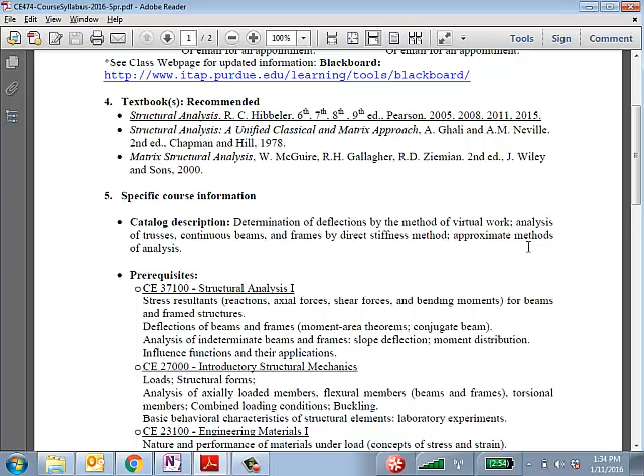Specific goals for the course are on the next page. Essentially this revolves around the key topics in this course. In the previous course, say 371 or Structural Analysis 1, you might have learned basic techniques of structural analysis, mostly for determinate structures. Did you guys see indeterminate structures back in 371?

Some indeterminate structures. So here, what we're going to learn is a slightly different way to approach analysis problems. These are based on energy methods, which is the first topic - principle of virtual work - to analyze different types of structures. We get into a method called the force and flexibility method, which you've probably seen in a simpler form for determinate and indeterminate structures. And then the main focus of this course is going to be on topic 3, the displacement or stiffness method.

In this displacement and stiffness method, we will make pretty heavy use of a computer program, essentially MATLAB, where you won't have to program, but I'll give you sample MATLAB codes to be able to do simple structural analysis, for which you do need some basic knowledge of MATLAB. And I know that some of you may not be very comfortable with that, which is perfectly fine.

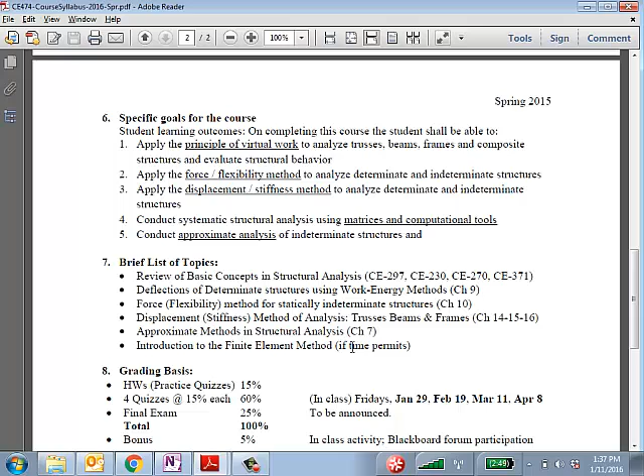We'll work through that, and I'll do a few sessions on basics of MATLAB as well, for you to get some experience with how to run those codes and how to analyze the structures. And finally, we have approximate analysis methods. This is sort of the brief list of topics. I've listed one last topic on an introduction to finite element methods. This is a method that is applicable to not just structural frames and those types of structures, but in general, any structure that can be used. So let's see if we get time to get there.

Any questions so far on any of the topics or things, or contact hours or anything?

Okay, so let me get into the grading basis then. There's going to be a few homeworks, pretty much one every week, but I'm going to do homeworks a little differently than what you might be used to. It works pretty fine, I'll talk about that in a bit. There will be 4 quizzes over the duration of the semester, and initially I was planning to hold those quizzes right here in class on Friday, but looking like it looks like we're going to be a really tight fit in this room, so we might have to move it to an afternoon or evening exam type of quiz.

So I'll figure that out and let you know. But the dates would be these. These are Fridays of every 3rd week into the semester. So please do make a note of that. If there's any conflicts, let me know as soon as possible. There's a final exam, 25%. That brings us the total to 100.

And there's going to be in-class small activities from time to time, which is basically just to make sure that you are participating and following what is being covered. So that's a bonus over and above the 100%. So that's sort of the grading basis. Like I said, I'll come back to the homeworks.

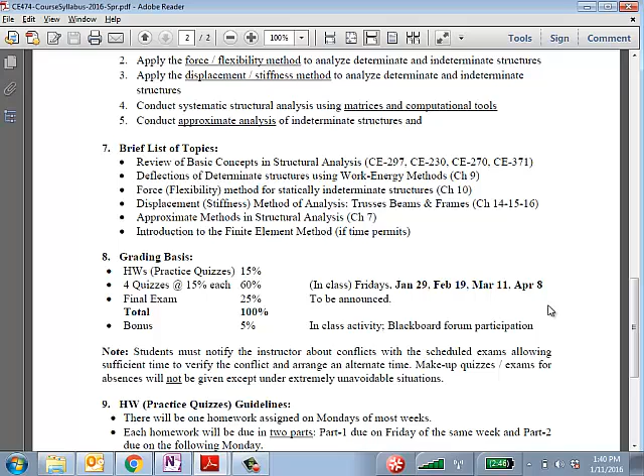All right, so let me talk a little bit about the homeworks. As you can see, it says there's two parts to it. Essentially, it's the same homework, just you need to submit it in two parts. In part one, you make your best effort independently without any external help, and it doesn't matter if you get the problems right or wrong. Okay, just make your honest, independent effort.

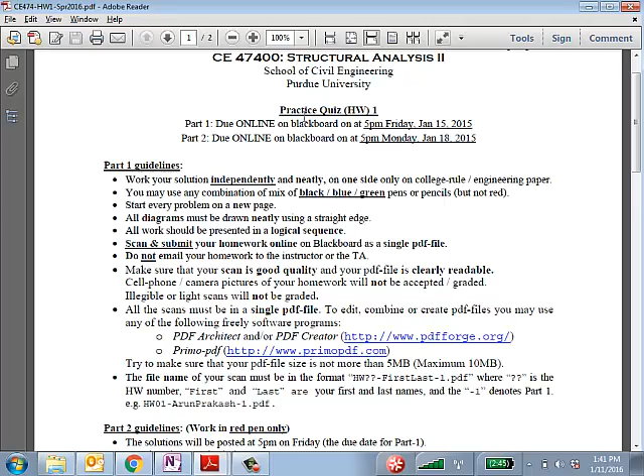Then scan and submit your homework to the Blackboard website. I've given some directions here on how to create a PDF file if you haven't done that before. And then this part one would be due on Friday. And on Friday itself, we'll post the solutions to this homework. Even though I'm calling it a homework, I sort of refer to this as a practice quiz. It's practice for the quiz that comes every third week in the course, and actually practice for everything following that as well.

So part two is basically where you take your solution from part one and, looking at the posted solutions, compare your solution to the posted solution. As long as you correct any errors that you might have made in your own solution, and I added a few more points here, like list the most important concept for each problem that you think you learned from doing this problem, and briefly comment about how you would cross-check your own solution or the posted solution. So part two is basically making sure that you go back and look at your own solution from part one.

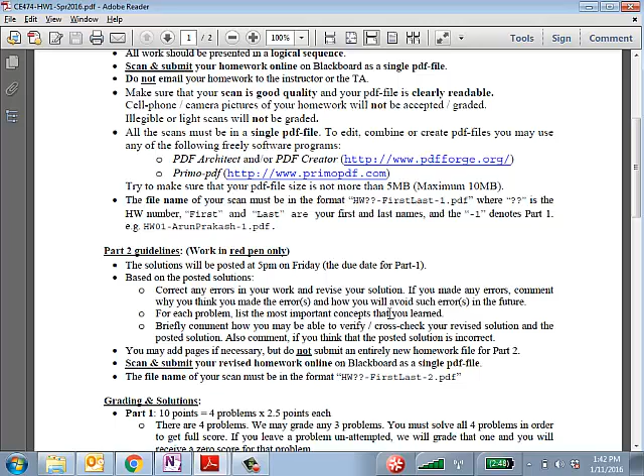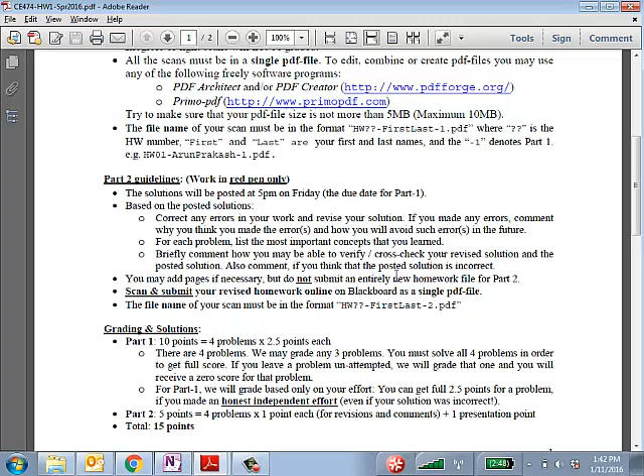And then you need to just upload the revised PDF back to the Blackboard web page. And the way that we are going to grade this is part one is 10 points, where again, as I said, do it independently, doesn't matter if you get the problem wrong. If you made an honest effort, you're going to get full points for that. Part two is 5 points, where we look at your revised solution, if you made any errors, correct them, comment on what we learned, and all that stuff. And then 1 point for presentation, for a total of 15 points for each homework.

So there will be 10 weeks, 10 homeworks through the semester, 15 points each. That's 15% of the grading basis. Make sense? Okay. Any questions on this? No? All right.

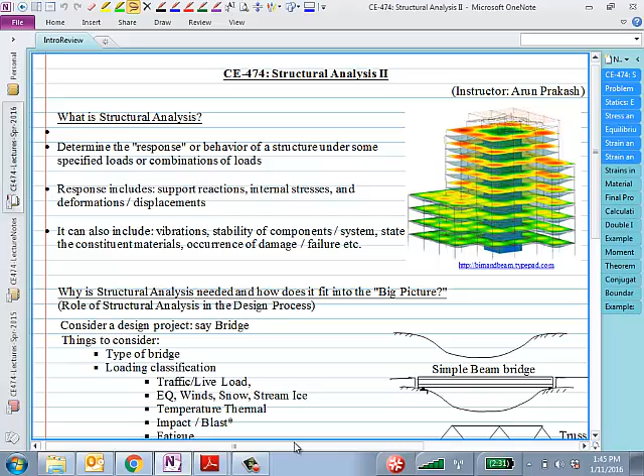All right, so today we'll keep it fairly simple and straightforward—basic introduction type material. As you all know, structural analysis is basically trying to determine how a given structure responds to loads and any type of stimulus to the structure itself. The response—what do we mean by response?

Basically, we need to find the external reactions given loadings, boundary conditions, the structure, and supports. We want to find what the external reactions are, and what all the internal forces are—in terms of shear force, bending moments at different points in the structure, what the stresses and strains are at different points. That's essentially what structural analysis is. We try to analyze a structure for given loads and boundary conditions and so on.

I would also point out that structural analysis, in a more general sense, also involves dynamics. What you all have studied until now are mostly static conditions—like given a structure, given load, how much is the deflection, or what is the shear force or bending moment at a certain point, at a specific instant of time,

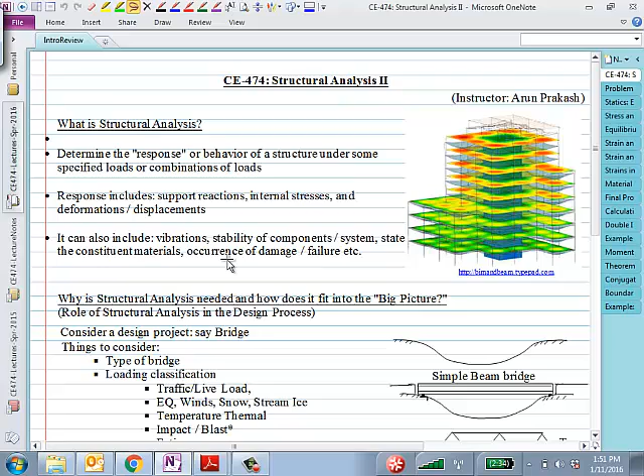Essentially what's happening is that up until a certain amount of load, the structure was stable. But as soon as we reached what is called the Euler buckling load, the column buckles and it becomes unstable. This is an advanced concept, but these are things you will learn as you go on to practice, and also as you go on to graduate school.

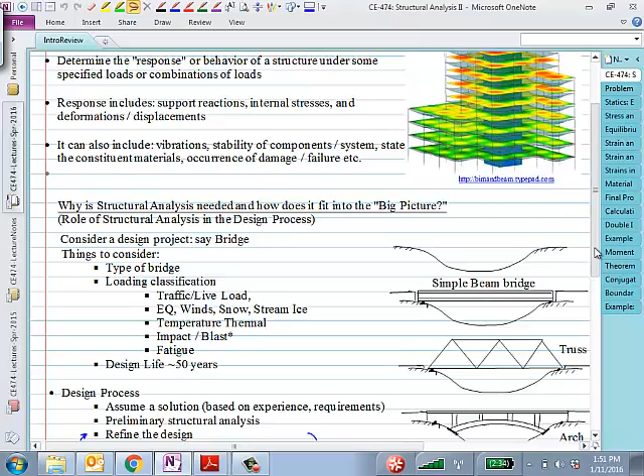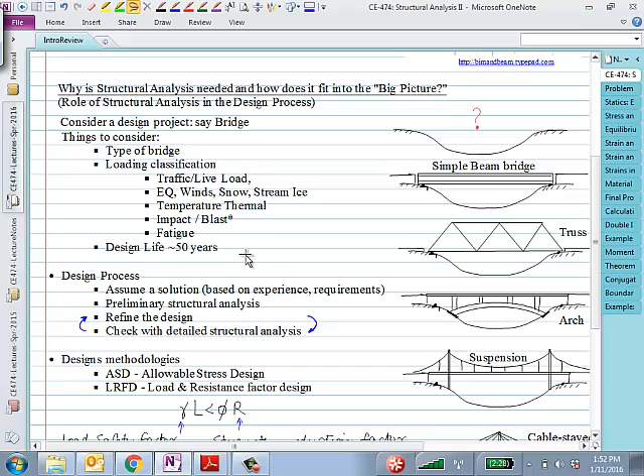So, but again, we will not get into these types of details. Let me talk about where all this fits into your education, into the big picture. Obviously, structural analysis is needed when we are taking on a big construction project or a design project. Here's an example of a bridge. If I have an opening, the design problem is, what is the structure I'm trying to solve, or build here? The way we normally approach this is we come up with preliminary designs, analyze those designs, refine the design, and keep repeating this process.

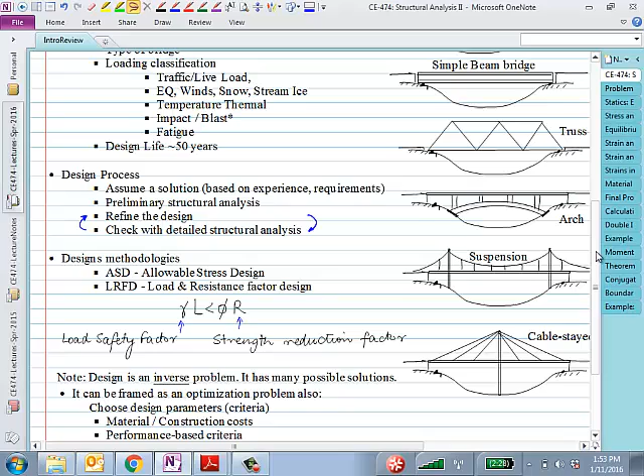I'm sure you understand where this fits, but the idea is that structural analysis comes in where you have a preliminary design in hand, you know what materials, what members you're choosing for different beams, columns, and slabs. And then you want to check whether this preliminary design satisfies the requirements you might have set for the structure. Essentially that's where it fits.

Quick comment about the design process itself. Design, as I said, is a much harder problem than analysis, but normally we don't approach it in that sense. Design is an inverse problem. Inverse problem meaning, given like an empty valley, the question really is, what is the structure that would satisfy all these conditions, that would be able to take this load, survive this amount of earthquake, this amount of wind load, this amount of snow load, and last for, say, 50 years. So really, it's an inverse problem, whereas structural analysis is a forward problem.

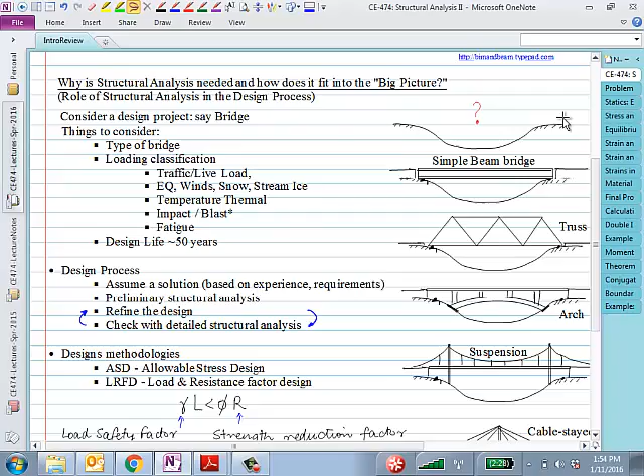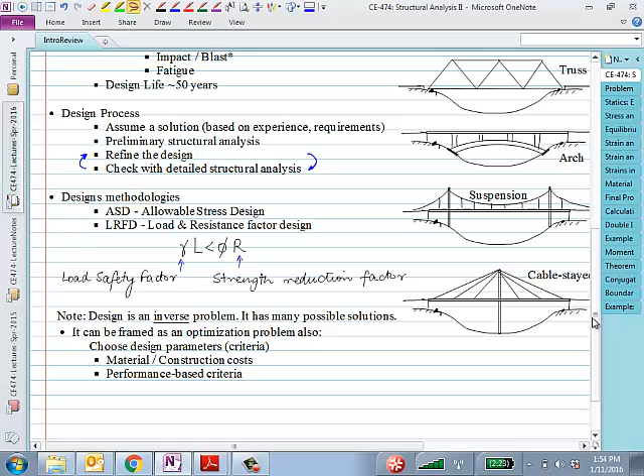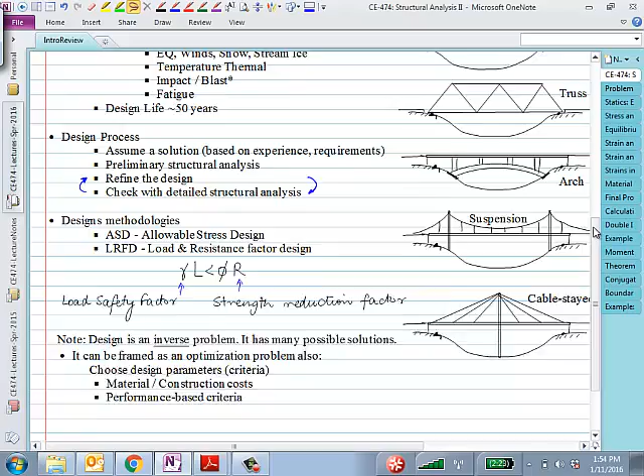Given a structure, given the loads, how does the structure respond? Technically, design is an inverse problem, but that's usually so hard to solve that we frame it in different terms and come up with simple preliminary designs, then refine them using analysis. So this is just a warm up of where we're headed. The problem of structural analysis fits into the big picture with design and all that.

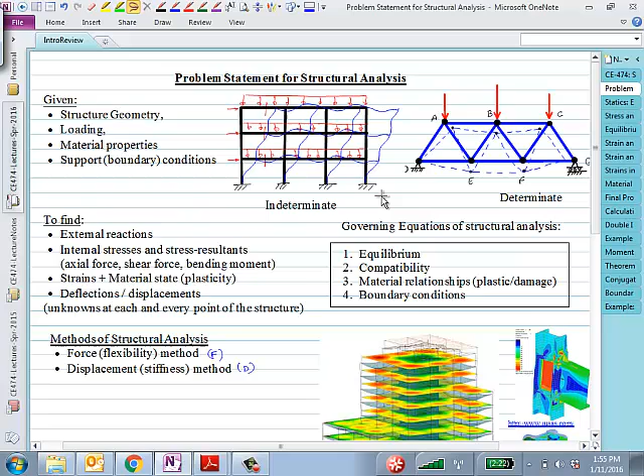But if we focus on the problem of structural analysis itself, what do we do? How do we solve a structure? Normally, in structural analysis problems, we are given a structure, either this type of frame building or a truss or any other structure. We are given loadings, dead loads, live loads, any transverse loads, and so on. We are given boundary conditions, meaning supports, so we can ensure equilibrium, and we are given material properties of the structure.

These are the four things that are usually given to us in a structural analysis problem. What we are trying to find is all of these things: external reactions, internal stresses, and in general, stresses and strains at different points of the structure. In building frames, we don't really get into that much detail trying to find stresses and strains at different points, but by looking at the moment capacity of sections, we can judge whether this amount of stress and strain would be acceptable or not. Other than that, we are trying to find deflections at different points of the structure.

How do we do this? We solve certain equations. We solve equilibrium equations. Of course, we need to have sum of forces, sum of moments equal to zero at each and every point of the structure. That's the important part of that statement. Equilibrium, of course, means sum of forces and sum of moments has to be equal to zero. If I have my cantilever beam with a tip load, the vertical force down here is the same as the vertical reaction up here. This is causing a moment about the fixed support.

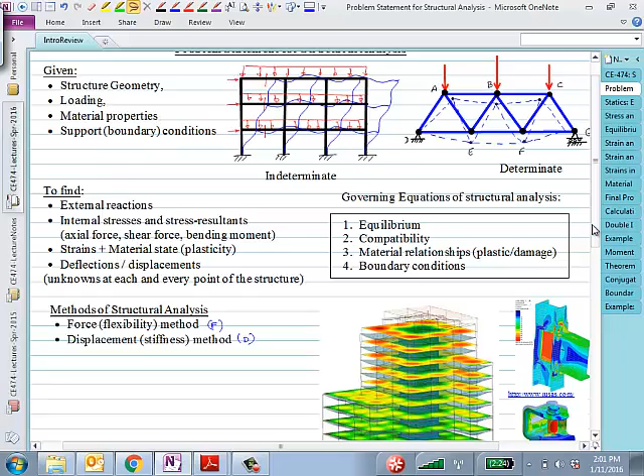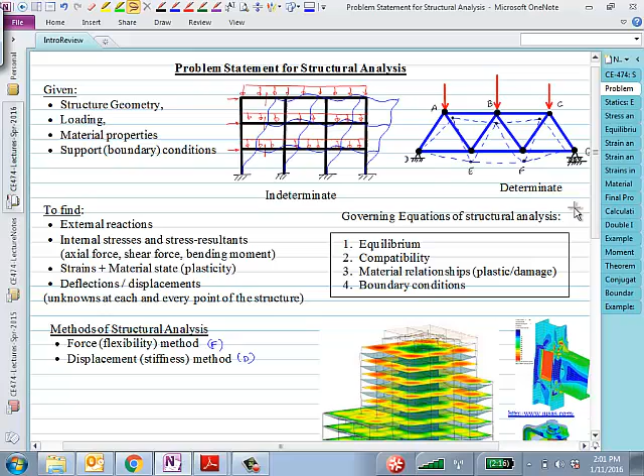So this is basically the overall statement that given certain things about a structure, a loading, boundary conditions, and so on, these are the concepts that we use to solve them. These are the equations that we use to solve them. And primarily, we have these two types of methods for analysis: a force or flexibility method, and it's very related to how you solve indeterminate structures. Some of you might have seen that before. And the other, displacement or stiffness method, is what we are going to learn in this course, maybe towards the second half of this course.

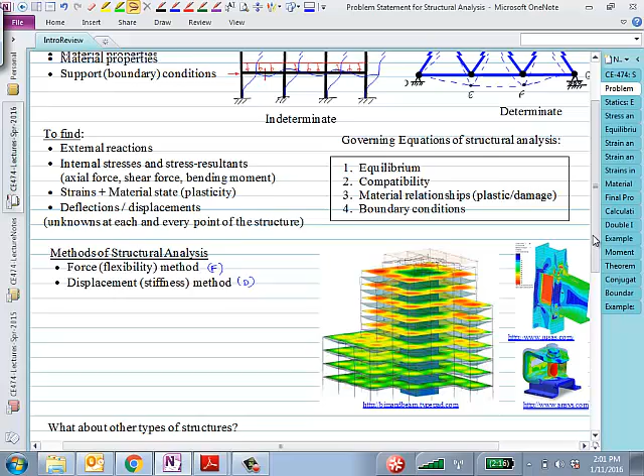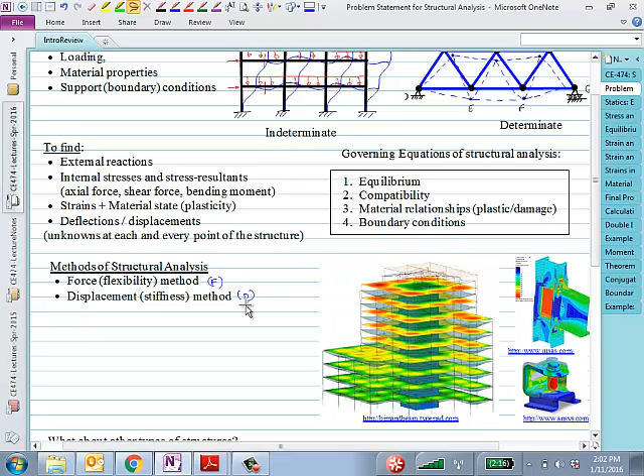So all these methods sort of work well for these frame type structures or beam type structures. But in general, when you have many more complicated structures, how do we go about it? If you have, say, a structure like this, anybody know what this is? The opera house, a very complicated shell structure. Nuclear cooling towers, a dam. These are not beams or frames or plates, or slabs or something that we can simplify and apply our conventional structural analysis techniques that you might have learned till now. How do we solve these things?

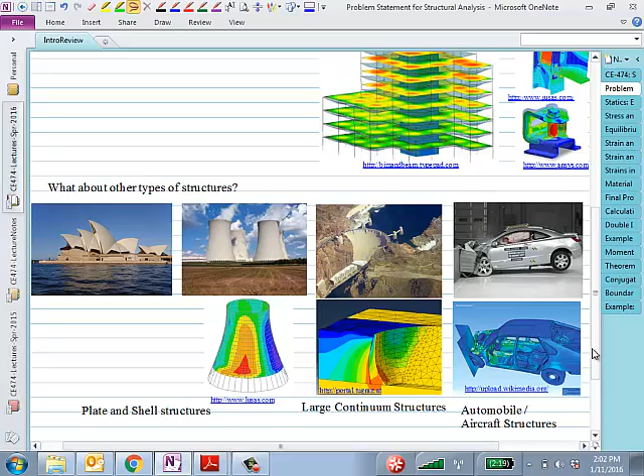So the idea here is that no matter how complicated the structure is, the underlying governing principles of structural analysis remain exactly the same. What do we use? We use these 4 principles to solve even those complicated structures.

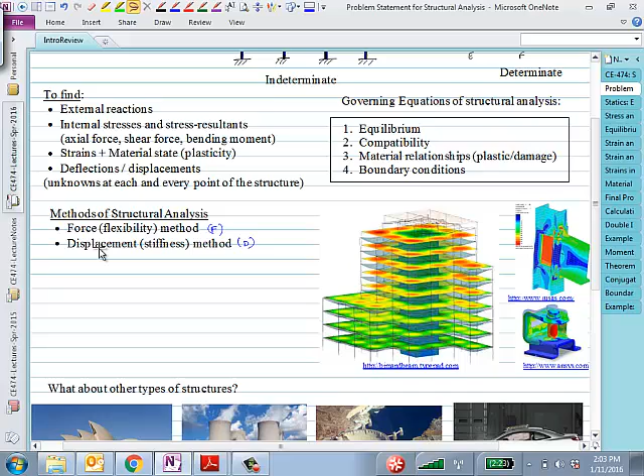Every structure better be in equilibrium, better be compatible, better satisfy its own material relationships, and better satisfy its boundary conditions. But the methods we use would be much more general than these flexibility and displacement methods that we normally use for frame structures.

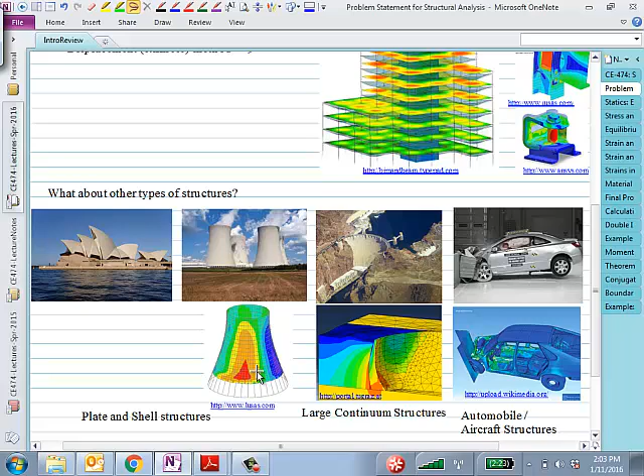A common example to solve these types of problems is the finite element method, which we'll get into towards the later half of this course. Any questions on anything so far? I'm just trying to set up the stage to get into some technical material now.

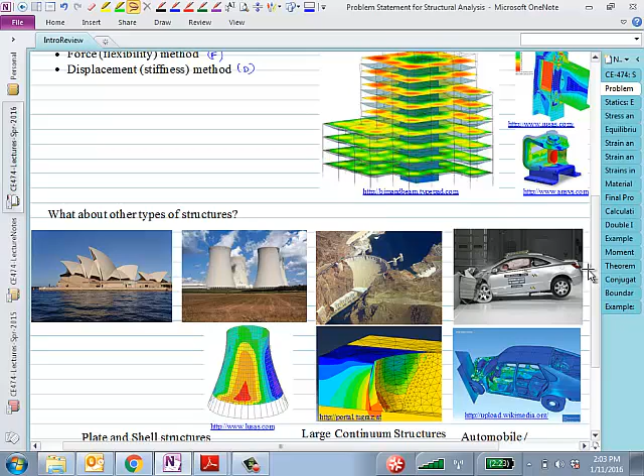No questions? All right, so let's do an in-class exercise. Here, what I'd like you to do is take a piece of paper, write your name on it, and answer these 3 questions.

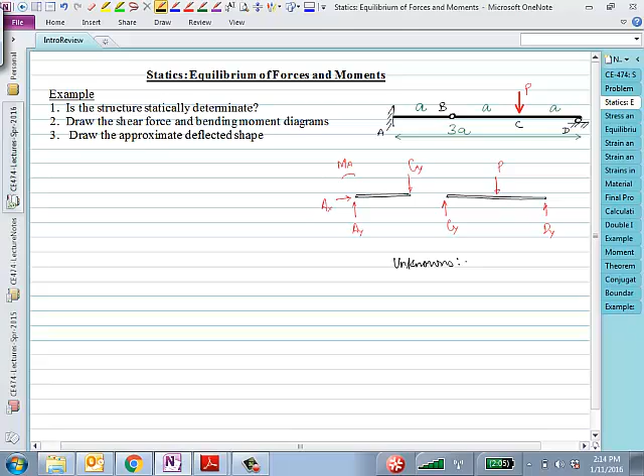So my unknowns: 1, 2, 3 unknowns here. Cy is the fourth unknown, and Dy is the fifth unknown. Total number of unknowns is 5. And equations...

Equations. How many equations do I have for these two free body diagrams? 6 equations. Seems like we have more equations, less unknowns. Can anybody tell me why is that?

That's right. So we did not account for the internal x forces. What we'll do is take out the equation of sum of forces in the x direction equal to 0 here as well, because that equation essentially says 0 is equal to 0. Or the other way would be to put a Cx pointing here, a Dx pointing here, but since this is a roller, there won't be a Dx, which would essentially say that the Cx force itself is 0. So either way, you have 5 equations, 5 unknowns, or 6 equations, 6 unknowns.

So I write it just like that: 5 equations, 5 unknowns, or 6 unknowns and 6 equations, with the hope that you understand what I'm saying here. The equation for the second body that says sum of forces in the x direction is 0 is just a trivial equation. It says Cx is equal to 0.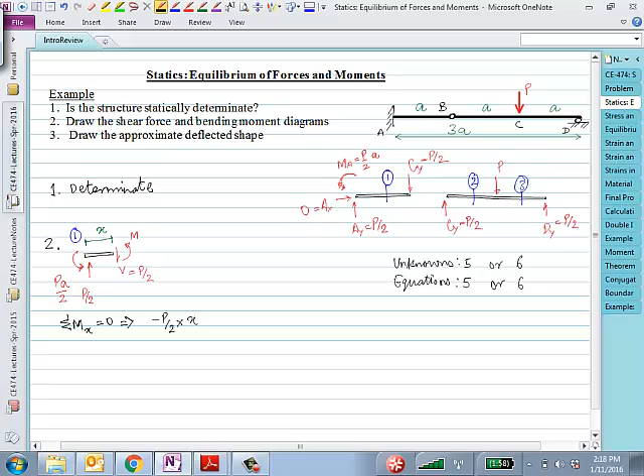So you can take equilibrium about any location. Sum of moments about point X equal to 0 implies minus P over 2 times X plus PA over 2 plus M equal to 0, which implies bending moment at a distance X would be given by minus PA over 2 plus PX over 2. This is for cut 1.

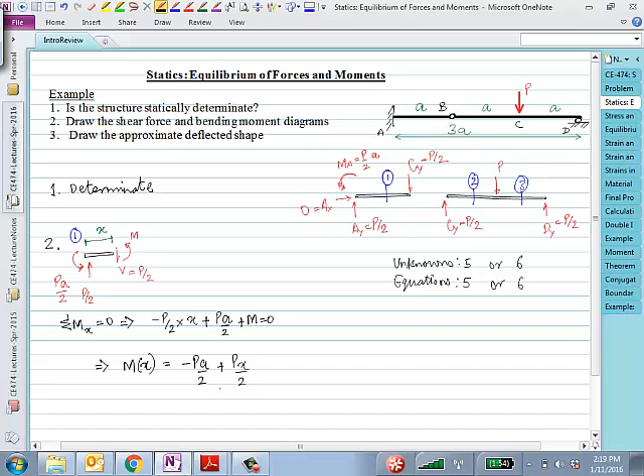You can repeat the same logic for cut 2 and 3, and draw the shear force and bending moment diagrams. Essentially, what you should get is something like this. This is the original beam.

For V, I would get P over 2, go up P over 2, go all the way across to this guy, go down by P, go back here, P over 2, and back up to this. So shear force all along the beam, all the way to the point of the load, is P over 2. It drops down by the amount P, and then goes back up at the end.

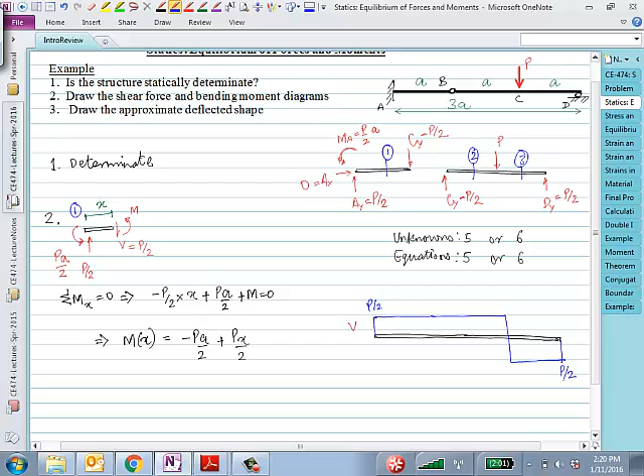And finally, the bending moment diagram would be, noting that at the right end of the roller, at the internal hinge, it should be 0. And would it be positive bending moment in the portion from B to D? It's going to curve like this. That's positive bending moment. So we'll get 0 at the hinge, positive like this, and of course they should match.

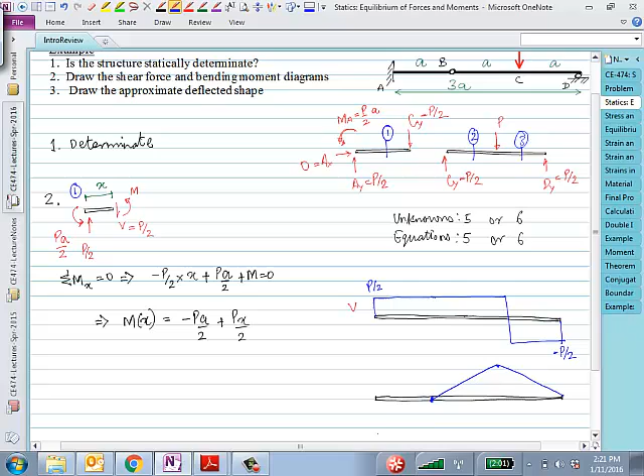And then the same line goes out here. This amount is PA over 2. This is negative PA over 2. This is the bending moment diagram.

So once again, what I tried to show you here was a long way to do it, or you can use certain relationships and intuition combined with whatever techniques you might have learned before to draw shear force bending moment diagrams quickly, because in this course we'll be using these types of diagrams to then determine deflections and so on.